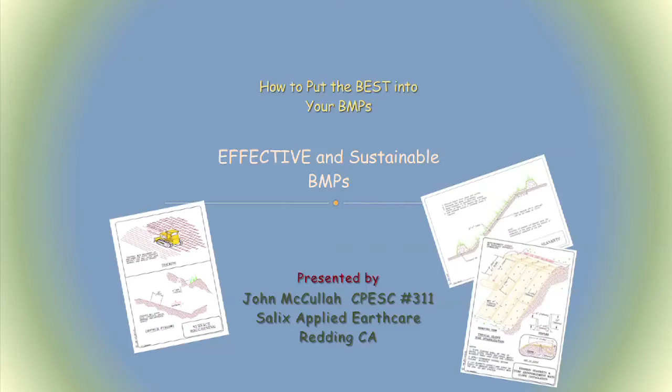Anyway, we're going to talk about BMPs, one of my favorite things, and how to put the best back in your BMPs, how to make them effective. It might sound funny to be doing a keynote on that, but that's what I like. It's what seems to interest us. It really is what drives the Clean Water Act. They are the methods of compliance. They're how we do it. That's where the rubber meets the road. We've got all these other things involved, and we have to understand the BMPs.

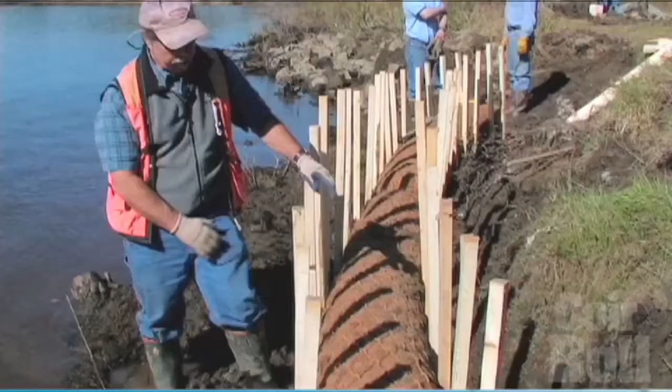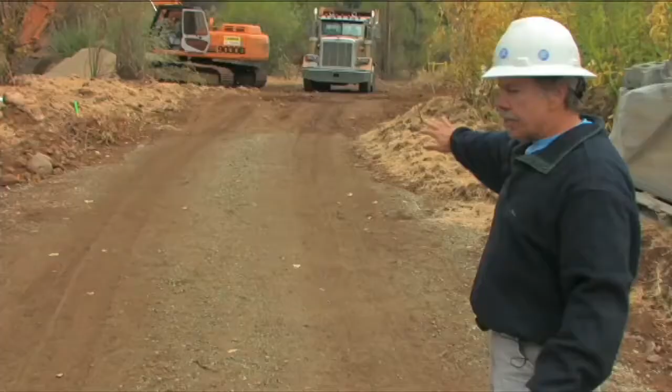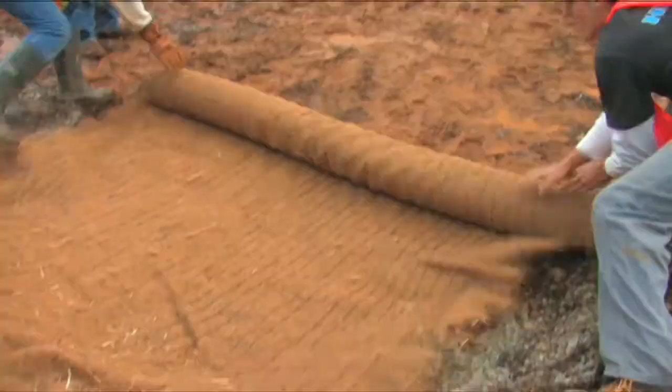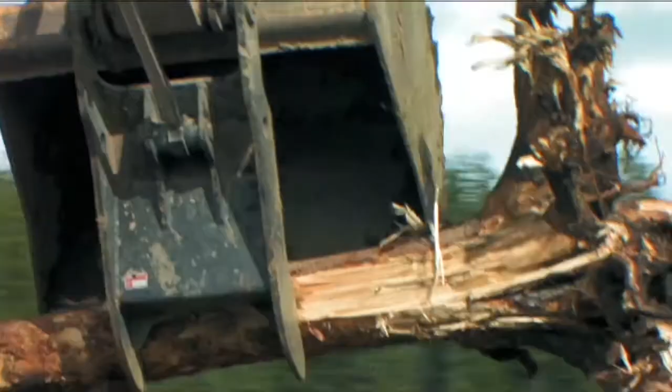Hey everybody, welcome to Dirt Time. Today's episode is going to be really cool. This is our extreme slope erosion control stabilization episode, ditch check episode, shoreline protection. We're in the Canadian Rockies, Fairbanks Alaska, the Hinton 2 project. So we're doing bioengineering, gravel bag check dam, live siltation, landslide repair, joint planting, the EnviroBurn, engineered log jams, root wads in there, energy dissipators, the rolling dip, a stormwater detention basin, the duckbill, this is a coir log, triangular silt dike, a live pole drain, articulated concrete blocks, the fascine bundle, rock-filled Gabion baskets, modified mechanically bonded fiber matrix, modified gravel bag check, EnviroBurn, native seed. So we're doing live staking here, mechanically bonded fiber matrix, I want to get some fine spray. We know mulch is good. This is the native seed, about 150 pounds per acre, 6 inches of base. We want it to sheet off this way, all the way up the slope here. Seed all the way up through there. There's one, there's one, working good. This is your driver, you got to get them all the way in. This check dam, it's holding back 1,200 gallons of water. Look at the erosion - the worst thing you could do is use stupid BMPs. It's like a little Gabion basket, quarter-inch hole. These branches will be planted, some rocks along in here. This will be our construction unit, next bag on top of it. Now with a few extra root wads in there, deflecting the water down. A live pole drain, or a draining fascine we call it. Laid these boulder clusters out in the river there, modified brush layers. Compost blanket down, the seed is in the mix already. Articulated concrete blocks, you can see how the blocks lock together. I feel good about this. I can't wait.

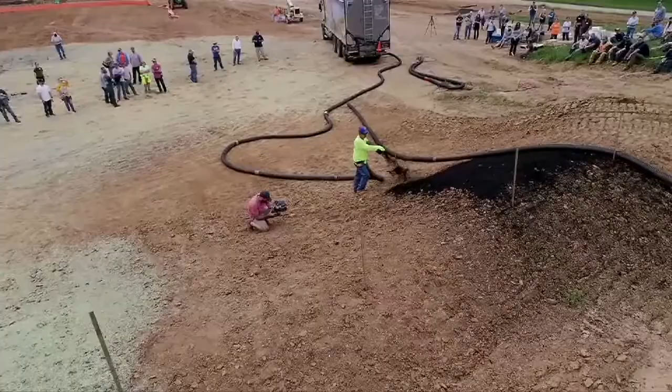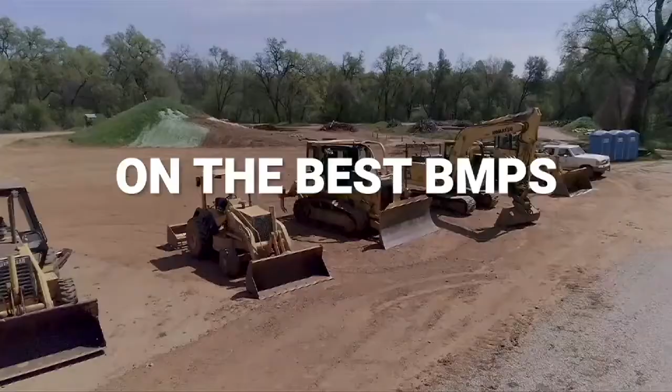Next to hands-on, the next best thing might be watching a video. If you have less runoff, guess what - you have less discharge. 90% of the erosion energy in the world is raindrop erosion. So what's the treatment for that? I just named 4 practices for erosion control that are greater than 90% effective, if you do it right. How do you choose your BMP? Let's put our BMPs in a toolbox so you grab the right one. We've got soil prep BMPs, we have erosion control BMPs. Now we're talking sustainable erosion control, right?

So we're going to talk about the BMPs today, the types of BMPs as they relate to erosion, so the types and causes of erosion. Remember, raindrop erosion is different than runoff erosion, okay? That's going to get us a long way. So we understand the physical processes, and then we can select the appropriate BMP to go with that process.

How many of you would really love to be able to inspect or review an erosion control plan and feel very knowledgeable and confident in what you're looking at? How many would like to be able to do that? And how many would like to be, when you're out in the field and installing something, know that you probably did it right, or at least you've got all the principles right? How many would like to do that?

Or when you're talking to Buck, the construction foreman who's out there, and you're inspecting the site, and he's been there 40 years, and he goes, get on out of here. I've been doing erosion control since you were a little tiny tot. I know more about this. And actually, they haven't had any classes in this and stuff. So again, I want you to be confident that you have the understanding on how to do this.

So confident review plans, and we're going to look at implementation of the BMPs. And they are the tools of compliance, as I mentioned. One of the things that greatly helped me was to put the BMPs in a toolbox based on the type of practice that we need.

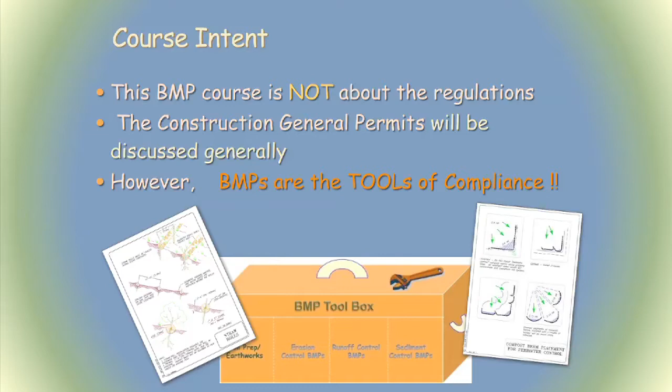So this training is going to be about putting our BMPs in that toolbox and getting it right. There's all sorts of courses out there about protocol, about SWPPPs. In California, you have to have a 22-hour training to be a qualified SWPPP developer, a QSD.

What does it require here to do a stormwater plan? Any civil engineer can do it? Who else can do it? Anybody? Anybody want to do it? Anybody wants to do it can do it? Who usually does it? Engineering firms?

Well, there's a lot of trainings, and I bet you that a lot of the engineering firms have been to these trainings, 22-hour trainings that tell you how to develop a stormwater plan, how to do inspections, what's a qualified storm event, all of those kinds of things. And that's not much talking about the BMPs.

One of the most important BMPs are those that get vegetation to come back. And generally, civil engineers don't necessarily have a lot of training in vegetative establishment. So there's a whole realm of this that maybe they're not exactly qualified for. Civil engineering was definitely qualified for all the hydraulic stuff. I wouldn't want to go out and design pipes and culverts and stuff without consulting a civil engineer to do some of the hydraulic calculations. Neither should a civil engineer call out some of the vegetative practices when they had no experience with those kinds of things.

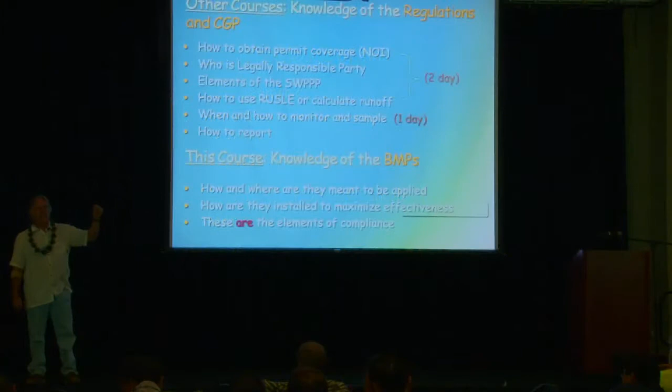And soil compaction, you know what we're doing now is we're decompacting the soils. If we want compliance, how many of you would love to have compliance, would love to have your notice of termination approved immediately so you could get out from under the stormwater plan? How many would like that?

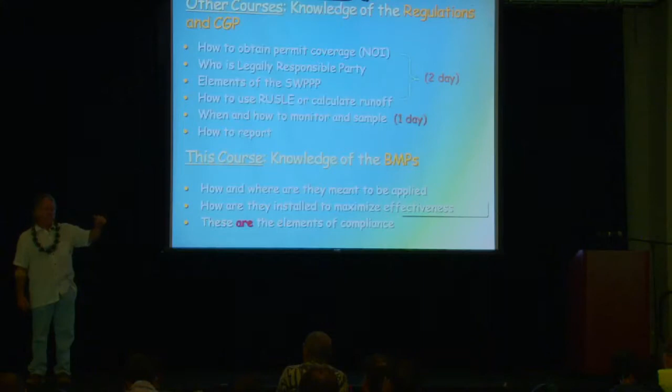So what's your goal? When you start the project, you should start it with the end in sight. And what's the end is to get that notice of termination, notice of completion, right? And what's that going to come from? Finishing the project, moving all your erosion control materials off the site, and having 70% cover of what was there originally. Adequate cover. Shouldn't we maybe start our plan with cover as our goal?

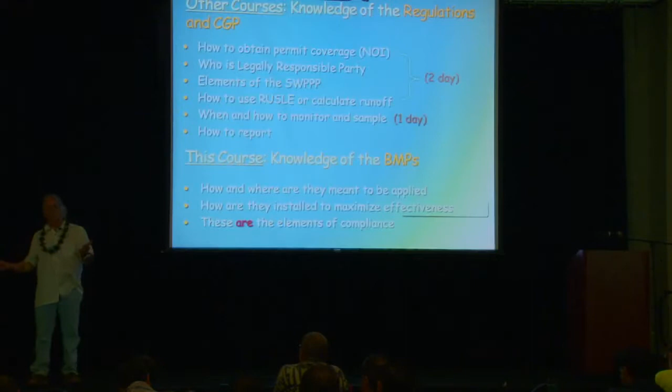Maybe things like compost, adding some compost to the soil, to really bad soil, thinking, at least when you go on there, how am I going to vegetate this? It's no longer, and I do this training with DOTs all across the nation, Alberta, New Zealand, and it's no longer okay for the civil to do the engineering parts of the highway projects and then just kind of leave the rest of it as an afterthought. It's okay to do that, but it ends up costing a lot of money, and you come back.

And then how about the requirement for plant establishment? 3-year plant establishment. Are we going to wait for 3 years to do plant establishment, and the whole time that project is under a SWPPP, where you're getting, how often do you have to do your inspections here?

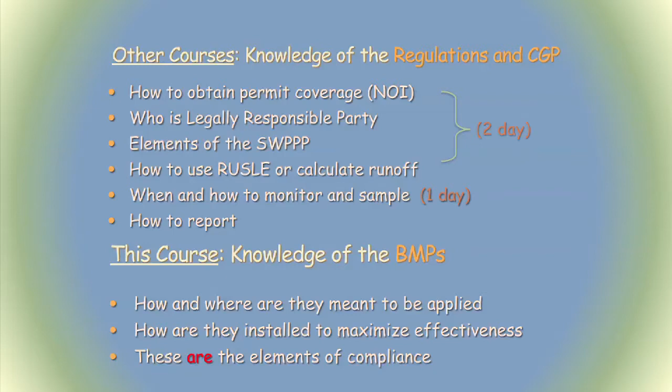Do you do inspections before, during, and after every storm event? According to the Clean Water Act, we have to do inspections periodically before, during, and after a rain event in California, and also at least once a week even in the dry season. That's a lot of paperwork, and you have to do all those things while you're under a SWPPP. So I want to get the SWPPPs done, get the notice of completion, and start looking at vegetation.

So we're not going to do this qualified SWPPP developer training. One of the things that's really informative is to talk to Junior Raindrop and Papa Cloud and see what's going on with them. Can you play this one for me?

Have you ever wondered about a raindrop's family? Let's drop in on Papa Cloud and Junior Raindrop. Uh-oh, Junior, get up, get up. It's time for you to visit your Mother Earth. Oh, Pop, let me stay here with you. Stop your pouting, and mind you, behave yourself. Get along now, off with you. Go along, son.

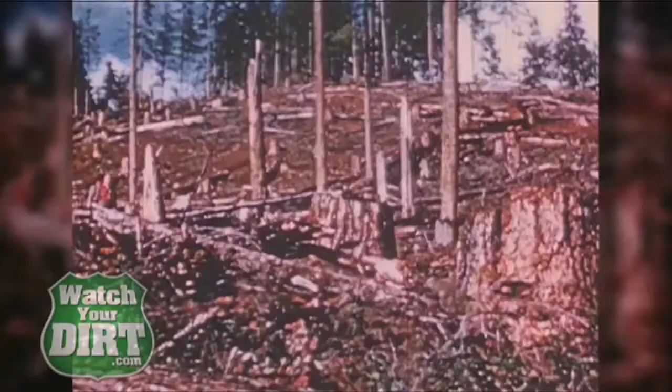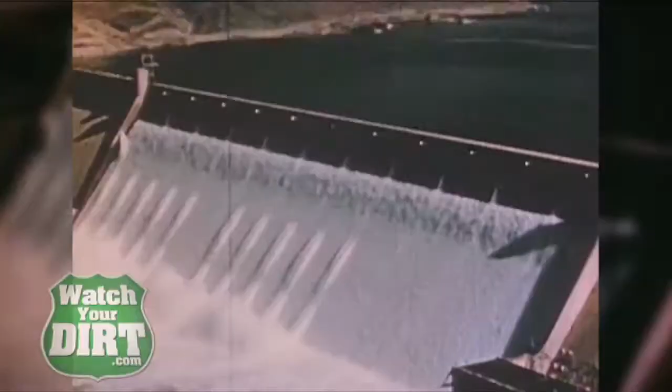Oh well, let's leave Junior to himself for a while. You know, little runaway raindrops love forests where too many trees have been cut down and rangelands that are overgrazed. They especially love burned over spots like this to dig their heels into. These hoodlum raindrops leave a trail of erosion, wasting soil that is needed to grow plants for grazing cattle and sheep, and trees for timber, soil that is needed for growing food, soil needed to store some of that water. They choke streams, soiling water needed for our farms, our industries and homes. They leave silt in reservoirs, wasted work. Reservoirs are built to store water, not mud.

Well, I wonder what's happened to Junior. Just what I feared, he's formed a gang, and they're whooping it up for a flash flood. They're rushing down the canyon. They've made a wall of water 20 feet high. Look out! Too late, now Junior is a real outlaw.

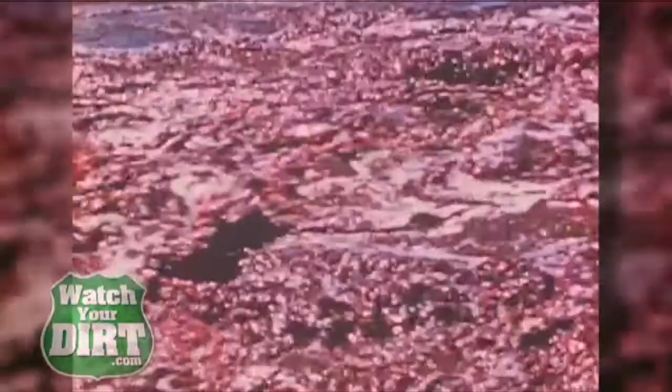No longer satisfied with flash floods, the gang is planning bigger and wetter floods. Junior's getting dangerous, he's getting tougher and bolder every day. Now he's a tough gangster, heading for the big time, raging along, waging gang war, robbing, destroying, killing. And all because somebody started a forest fire. All because no one cared about Junior Raindrop.

Now, if Junior had fallen on something soft, I call it cush for his tush, he wouldn't have gotten a bad attitude. You know how vulnerable children are that first couple of years after they're born? If he falls on a soft cushion of vegetation, or if it's not vegetation, it could be straw, or it could be a bonded fiber matrix, or it could be hydromulch. Do you think Junior knows the difference between landing on grass and landing on a soft erosion control product? He doesn't know the difference.

And if there's some grass already growing, Junior can just hang on, fall down the limb and go down and let himself down, and actually kind of sink into the soil. He can go back into the soil, run through it as subsurface flow, and come out at the streams or out at the ocean where he's nice and clean, and he can play with fishermen, and he can make a home for little fish and stuff.

But the alternative is Junior starts running with a gang, hanging with a gang, selling crack cocaine on the street corner, carrying weapons and stuff. The only thing we can do is surround them and catch them in a sediment pond, and we don't have much luck. It's like putting them in prison. And then I like to think of it, we take all the kids and shake them upside down so the switchblade knives fall out of their pockets and stuff.

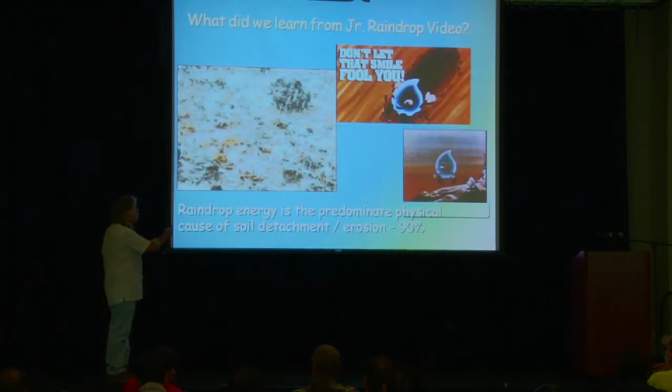So the raindrop impact is the number one precursor of erosion. 90% of the erosion in the world happens with the raindrop falling out of the sky. My physics professor at Humboldt State University showed that a raindrop will fall the average distance of 30 feet and reach its maximum velocity. It could fall out of a tree and reach maximum velocity. That is the energy that dislocates the soil particle.

It doesn't matter where we are, in what part of the world we're at. In the desert, when the rains come, the raindrop is going to dislodge the soil particle, or you're not going to have erosion.

And then we have this: are we going to let Junior gang up and run as a gang? Because when they start running as gangsters, that's not raindrop erosion at all. What is that? That's the tractive force of flowing water. That's an entirely different physical process.

Does straw mulch work for concentrated flows? Does it work on gangster action, I call it? What can work on gangster action? What kind of BMP? Name one.

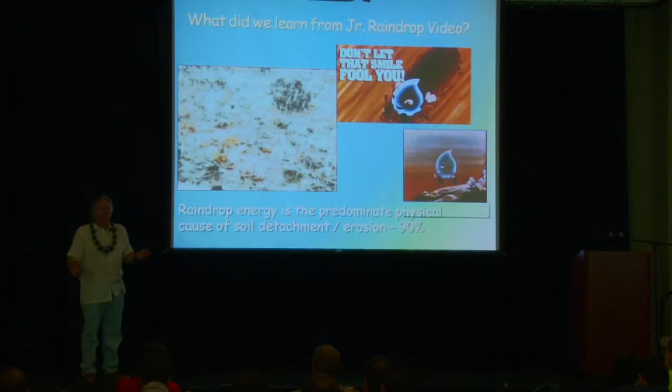We could put them in a culvert. The culvert won't erode. Cement. We could figure out whether cement or concrete or steel fabricated pipe would be better.

What's the better thing? We could put them in ditches and then armor the ditches so that the little guys that are on chocolate and stuff, and they've got skateboards, right? And they're ripping it up. They're doing half pipes and stuff, and they want to tear up that channel. And so we could line the channel with something they can't destroy.

And that would be like a turf reinforcement mat, strong enough to inhibit, but we're not going to be able to do things with mulch and hydromulch. Okay, and then the last thing we're going to do is try to corral them into a sediment pond.

So here's our little Junior Raindrop, this little guy right here. And as parents, what are we going to do? Get an insurance policy and hope that he lives to 11 years old, you know?

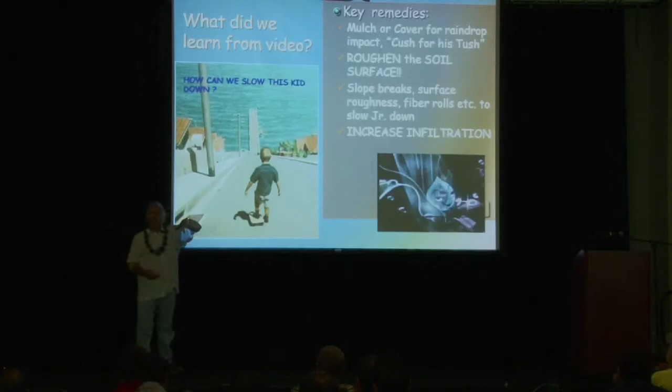Maybe what would be the best thing to do if I was a parent is I would be throwing gravel in front of him so he could never get going fast, right? At least he'd be on a skateboard, but he couldn't get going really fast. So that would be one way to do it.

We could certainly cover the ground and have cush for his tush, and then we could also roughen the soil. Oh, you mean I can't make the soil slick and hard? Backblade it with the loader?

What about the motor grader? Shall I blade it really smooth and hard? Shall I run the excavator, clean the slope up and down? Shall I use the teeth and scarify the slope up and down the slope?

No. I was just making a bunch of half pipes. Junior and his gang will be so happy with you if you did that. They'll be doing these snowboard deals and skateboarding and surfing.

And so we want to do our striations across the slope. We want to roughen Junior up, roughen the ground up. So hopefully you're never going to do things different.

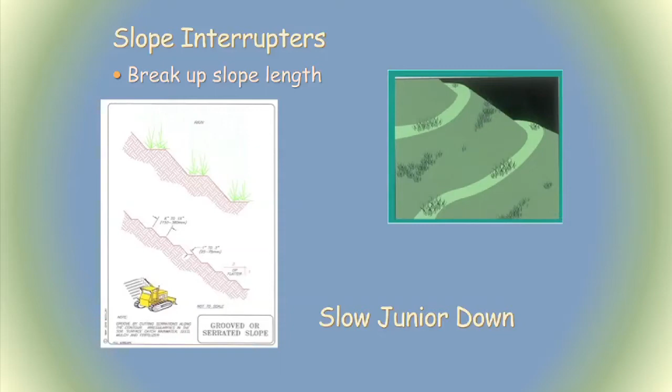We can slow Junior down, break up the slope length. One of the ways of doing that is with slope interrupters. And you're all probably familiar - this is California. We use slope interrupters like candy or something. You know, we put them everywhere to break slope up. And then there's battles within the various counties about what kind you're going to use.

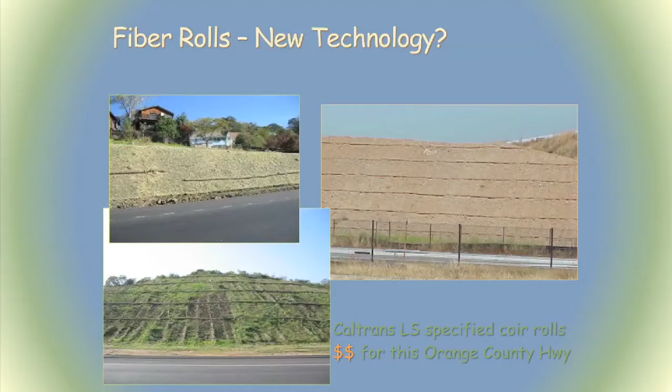Like in Orange County, they're really rich down there, and they buy their logs from coconut logs from Sri Lanka. They're not going to allow straw in Orange County. But anyway, you break up the slope length, and in the manual, of course, if the slope's steeper, you'll put your slope interrupter sooner, because Junior can get going too fast. If he's gentler, you can have them farther apart. Does that make sense? Okay, we're going to demonstrate slope interrupters.

Here's an example. I worked for several years for the state vehicle recreation area. This is a place where they ride motorcycles, and they're pretty thrashed watersheds, actually, already. And back in the early 20s and stuff, they were having these motorcycle climbs, these races. They were using alcohol-fueled motorcycles and alcohol-fueled guys with short necks.

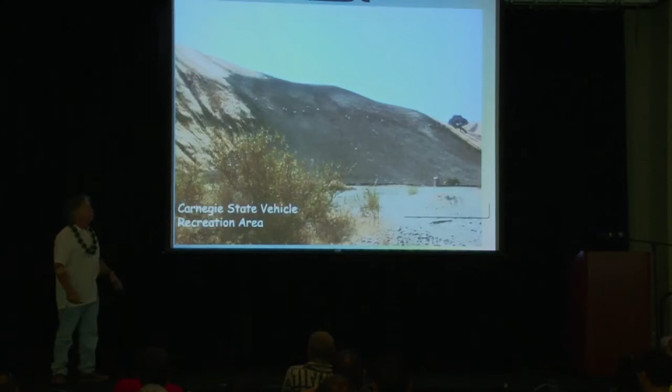And crazy what they were doing, and they're still doing it today. They'll climb these hills, but now it's a family deal. You go out and have places where you camp, and the husbands get to race these motorcycles. Because Kawasaki and Yamaha sponsor it, and there's so much money, 20,000 people come to one of these events, there's money to go back and fix the slopes afterwards.

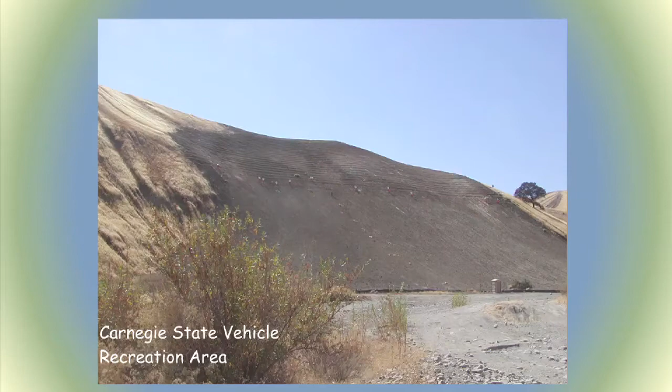And they're fixing it right now. Those are inmate crews, California inmates. I'd like to see more of this kind of work. We've been letting them out too often, and before they let them out of prison, we should be putting them on these crews and let them work a little bit on that.

And there's putting fiber rolls. They track walk that slope. Can you imagine it? Somebody ran a bulldozer up and down that slope. And this was just 7 months later.

That's just an extreme. So they scaled the slopes, they track walked it. By the way, that's 52% effective. They put straw wattles, they put mycorrhizae fungus, because that's an important relationship with the native grasses. They used organic fertilizer, so they didn't kill the microbes.

We're going to be at a compost facility tomorrow. We don't want to kill the microbes, we want the microbes in the soil. They actually sequester carbon also in the soil. It's our last big opportunity to sequester carbon. And then we use California native grasses.

So Caltrans has got this $300 million fine, and they're developing protocol and trainings and stuff, and in lieu of paying it, they've got a test facility, a test bed, which they tilt up 2 to 1, and they put various practices on it. And we studied track walking. They took the grousers off a D6 dozer, put it up on that test bed, and engineering students at San Diego State University rained on it.

A 10-year return interval storm for LA, that was 1.75 inches in an hour. That's a pretty good storm. Your windshield wipers are doing double time. You could be careening off the highway if you're not careful.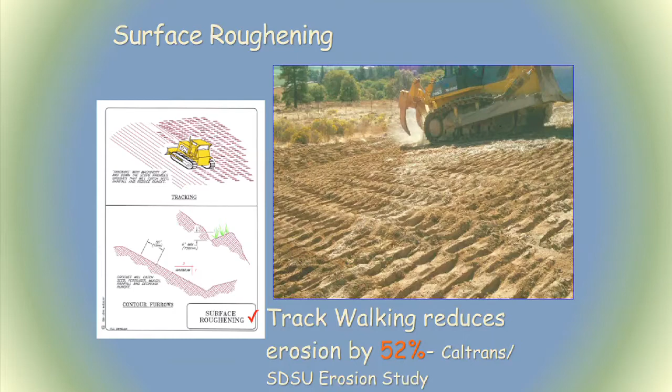And they tested it, set it down, dried it, replicated it 16 times. And they found that track walking is 52% effective. How many BMPs out there are 52% effective that you know of? What's a gravel bag in a curb? 3%. Studies have been done. We're talking 52%, if you turn that dozer around and walk it up and down the slope.

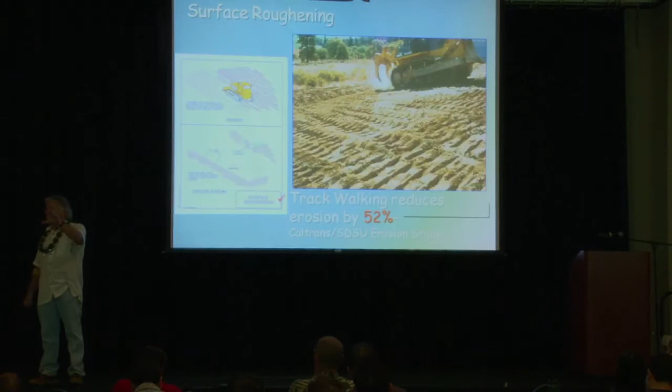Now the next thing Caltrans decided to do, they couldn't get the contractors to do it. Remember, our goal is to get vegetation down because we want our notice of termination. And they said all slopes prior to putting on erosion control materials should be soil prepped. And they go, yeah, they left it just like that. Well, the contractor got to do whatever they wanted.

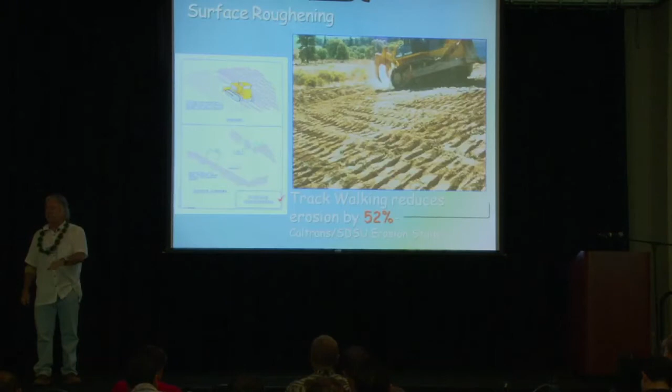The one that's 52% effective is track walking. It takes a lot of time, takes a lot of diesel to do that. At 52%, it behooved Caltrans, because they were getting fined, it behooved them to make this a pay item. The only way you're going to make this fair, you can fight with the contractor or make it a pay item and put it down.

So I'm urging you, some of these BMPs, put them down as pay items, or you're going to get it in the long run, you know? And so it's 52% effective. That's how it works. Can you play this one?

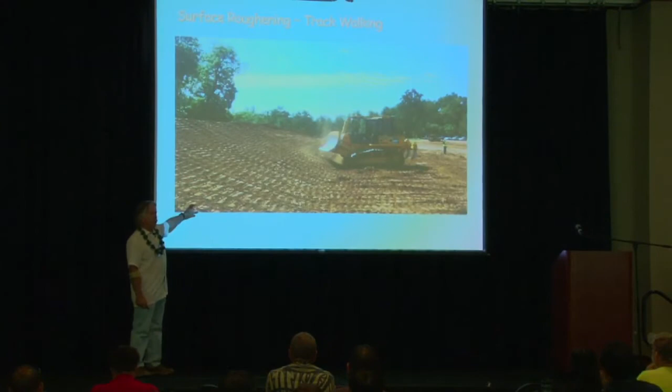If we had an acre of slope like this, with real erosion, we could expect 30 to 50 tons per acre to come off of that slope. 1 acre of slope like this, to track walk it, it's 52% effective. We reduced the sediment coming off of that. It was 1 acre at 50 tons, and we're getting half of that, so now there's only 25 tons per acre per year coming off that site.

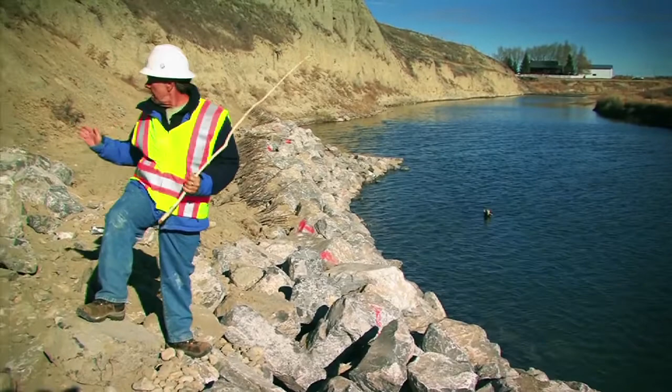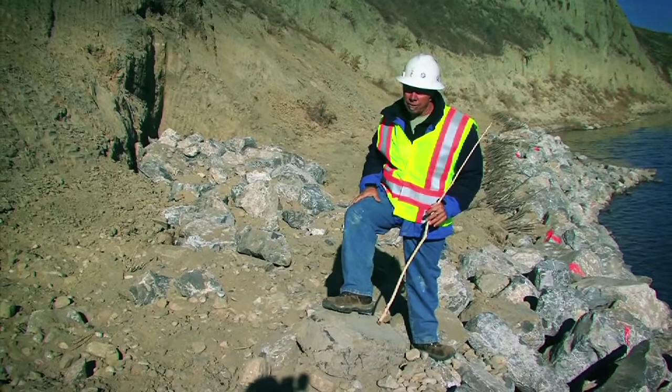We want to make sure that the water never gets around behind our structure. If it does, we want to make sure we have a very strong tieback or keyway at the upstream end. This trench here, filled with large stone, provides that protection. If water was ever able to get around behind it, this structure will force the water back into the river.

Right here we have a really good example of track walking. Track walking is a method using the bulldozer to roughen up the surface of the slope. It's in the realm of surface roughening - we have to prepare the soil before we seed it or mulch it. This technique uses a bulldozer to walk up and down the slope so the grouser tracks are perpendicular to flow. It's a really effective structural technique before you even bring your hydromulch out.

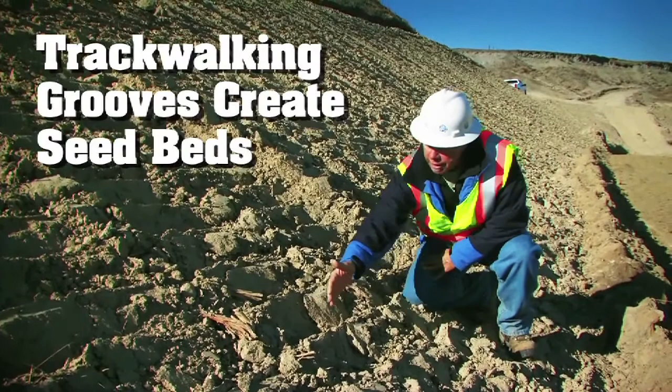It reduces erosion. In fact, a Caltrans study shows that this technique alone reduces erosion by 52%. It provides roughness on the slope face so the water can't build up speed - it slows down and can infiltrate into the soil. Every one of these grooves from the grouser is an area where seed and moisture will collect. Chances are we're going to get most of our vegetation growing in these grooves.

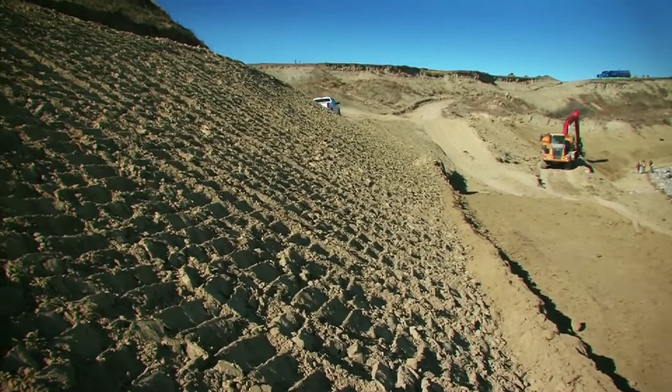One of the things about track walking is it increases surface roughening. By track walking the slope, we've increased our surface area by 25 or 30%. So if we're applying a hydraulic mulch, now we have much more area to cover, and we might need to increase our application rate by 25 to 30% because of that increased surface area.

Good job - you can see it works in clay, silt, and sand. Probably the only limitation of track walking is how steep you can get your dozer up. This is 2 to 1, slightly steeper than 2 to 1, and they had no problem at all track walking this.

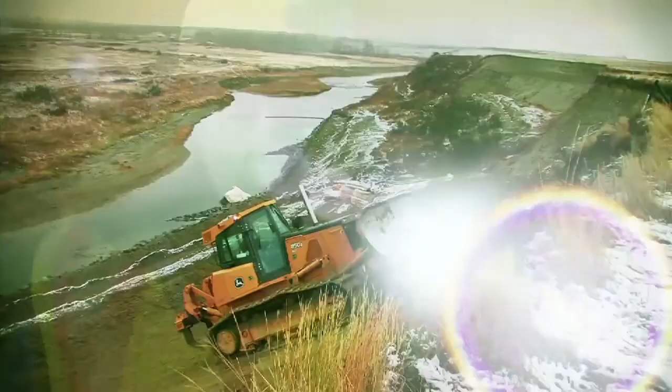This is probably one of the simplest techniques. We've always got a bulldozer on site - just turn it around, have the operator walk it up and down the slope, and you reduce erosion by 52%. It's almost a must on every construction site that you possibly can track walk it.

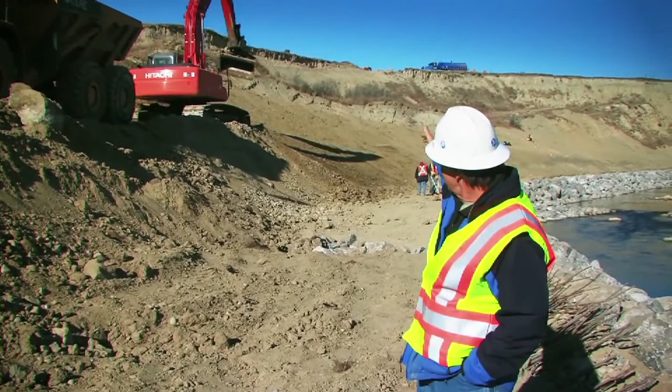The technique he's doing here is another form of surface roughening, called serrated slopes. He's using the teeth on the bucket of the excavator to try to get some serrations going.

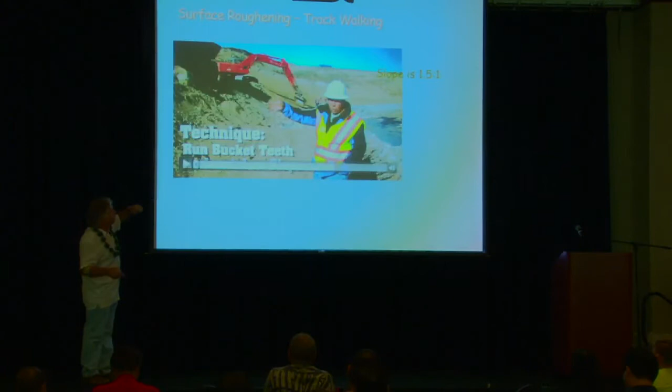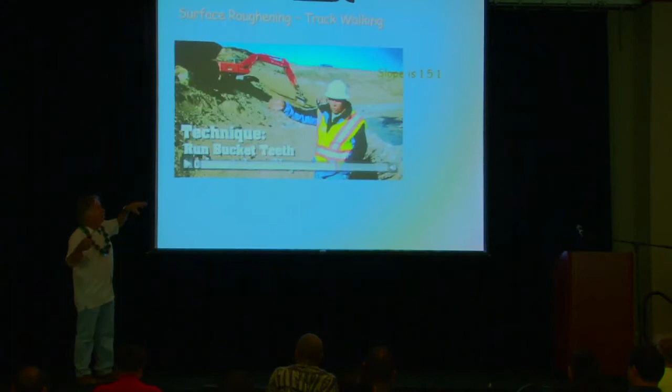On this large project, we put in a longitudinal peaked stone toe with live siltation. This whole design was a training workshop, and it was also a $2 million project. This is the main north-south highway for Alberta, and Alberta DOT was so stoked about learning some of these techniques. We had a workshop going on at the same time, trying to save this highway. So we either track walk it - we had 35 engineers in the province out there - or you could use this articulated excavator. Go ahead and play this.

It's going relatively horizontally - he's trying to keep the serrations as horizontal as he possibly can. Like track walking, it's going to slow up the rainfall from rolling down the slope. It provides little pockets for seed to collect, and the serrations in the slope will slow the runoff down. That's another nice technique - on cut slopes, you'll at least try to serrate them.

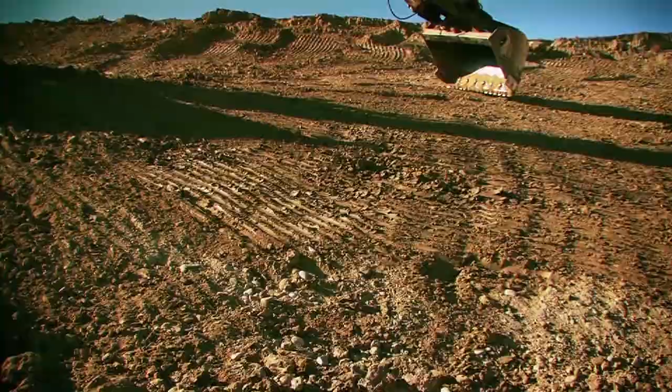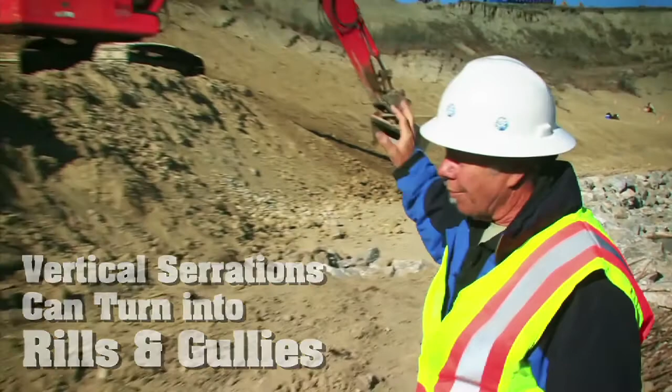The alternative is we've always cleaned off the slopes, but a lot of times the easier way for the operator is to scratch the slopes down, and then our serrations end up running up and down the slope, which are actually incipient rills ready to form. So you've got to groom these slopes anyway - let's groom them horizontal. Always try to keep it horizontal so that raindrop rolling down the slope has to slow down. And leave the slope as rough as possible so you have a seed bed where those seeds can actually become established. That's critical.

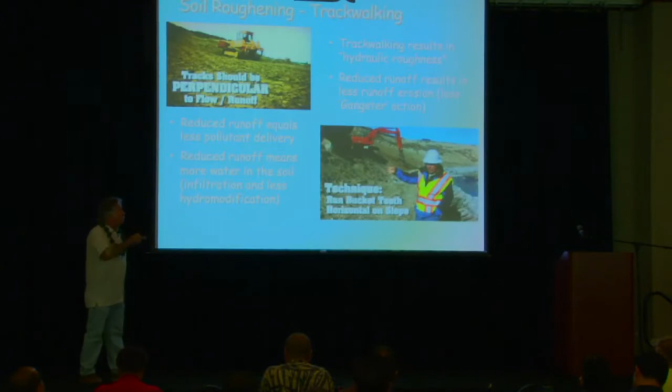It reduces runoff and increases infiltration rate. The question earlier was what kind of slopes can you track walk on, and the video shows we can do it on almost all slopes. Sandy slopes will fail a little bit but won't get overly compacted. Clay slopes you don't want to track walk too much, or you'll over-compact.

Why would over-compacting be a problem?

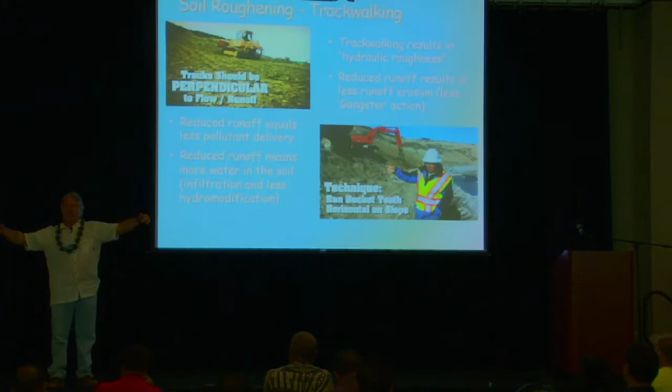We want water to go in and infiltrate a little bit. Unless you're in the highway prism or the engineered section, we would love the water to go in - in fact, vegetation likes 85 to 90% compaction. So we got Caltrans geotech engineers involved. If we had the right-of-way on highways, we have an opportunity there. Safety requires a 12-foot wide recovery section, and beyond that could be decompacted. In fact, the angle of repose is 2 to 1, and they agreed soils would stand at 2 to 1 naturally - we don't need 95% compaction.

Does that make sense? You've got your highway prism here, and you've got the other part of the highway - that's an opportunity to infiltrate and grow vegetation. Don't compact it to 95%, keep it at 85 or 90. Does that make sense? It was quite a political process to get geotech engineering involved in it too.

Okay, so we got our toolbox now. I'm a contractor also, and I was a handyman for a while, and I wanted to keep my tools lined up. I didn't want to grab for a pipe wrench when this lady wanted me to paint her house. You grabbed the wrong tool. We're always grabbing the wrong tool.

Grab the silt fence, grab the fiber roll. What's the problem? You got acres of bare soil. What's the problem? I want to grab out of my erosion control BMPs. I want to grab there. That would be mulching, erosion control blankets, compost blanket, and straw mulch. That would be for cush for his tush, right?

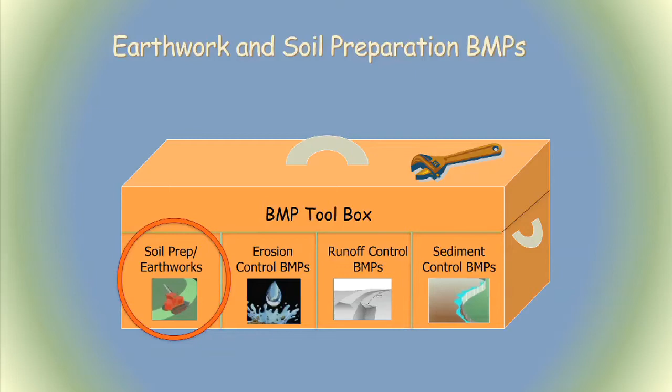I don't want to grab the wrong tool because it's raindrop impact, or I'm going to put my runoff control BMPs in there and sediment control BMPs over in the other section. These are sections I'm going to talk about later today also.

So roughness, track walking, it makes nice little places for the seed to catch and moisture to catch for plant establishment. There's step slope, slope rounding.

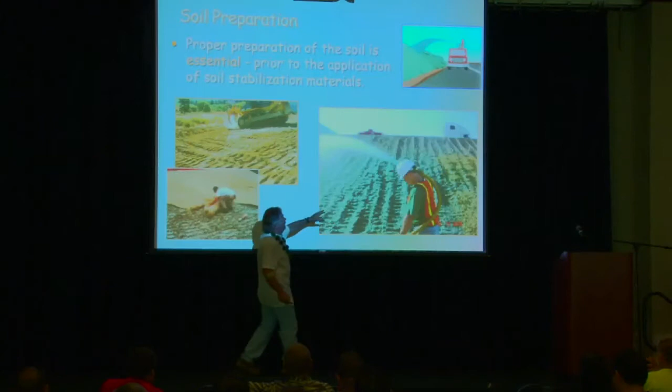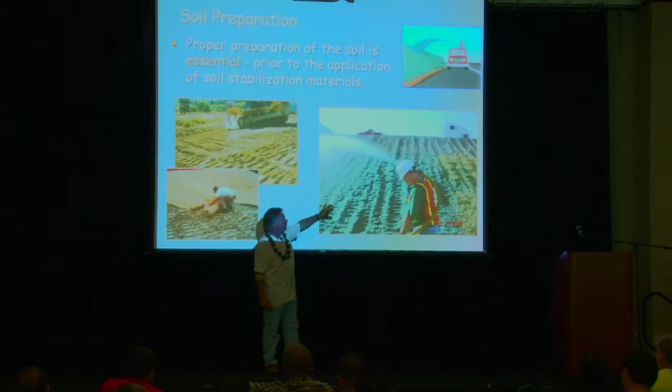I just want to mention while this picture's up, this is a BFM. This was a training we did down in northeast Los Angeles County. They had track walked this slope, and they did not intend to complete the slope. Why put grass down on it? They would have to remove it. A little bit of fiber does not damage too much wood in your fill. It doesn't compromise your fill.

So anyway, we placed this BFM on here at 4,000 pounds per acre, and we came back a year later and there had not been a bit of erosion. All the mulch was still in place. So sometimes you can buy a mulch that will last a year. They have another mulch like Flexterra that has coconut fibers in it. It'll last 2 years with no grasses.

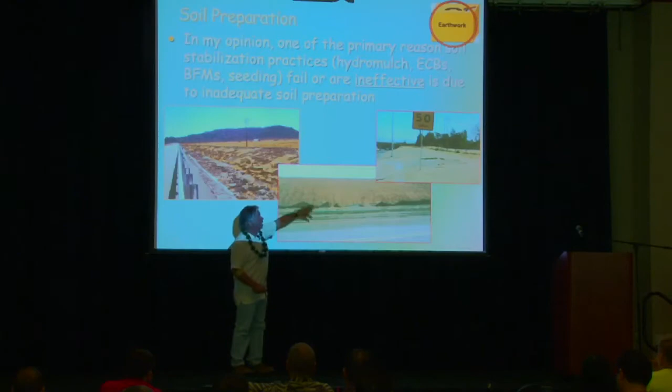I think that inadequate preparation is the problem. This is in New Mexico. They ran the tracks the other way - they ran the bulldozer this way, so the grouser tracks went this way, and the stuff just fell off. This one was cleared with an excavator. The guy was trying to clean the slope and formed rills already.

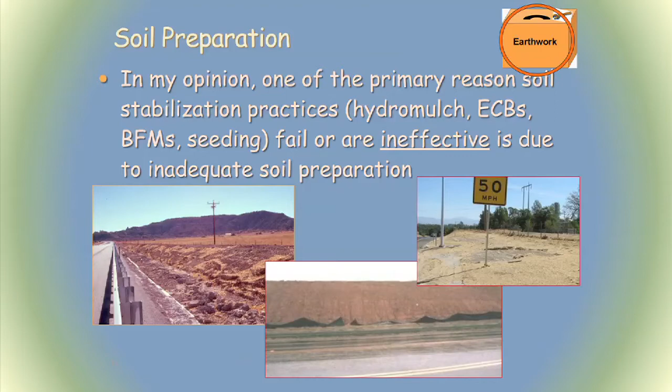And Caltrans in Redding had done this one. They wanted to regrade the side. They didn't even scarify or roughen the soil. This is a highway, a windy canyon through there. They put the mulch down and tacked it with a hairspray, and when the winds came, it rolled all the mulch up like a tent. So again, if you don't surface prep your erosion control, there's no guarantee it's going to work. Some kind of surface prep, some kind of surface roughening.

Look at this one. This is a big tall slope down in Lompoc, California, and on this long slope they used this really expensive coir netting, 900 grams per meter. And look at that - you can see now there's rilling going on under it. That's a long, long slope. That slope needed a slope interrupter. But it's really hard to put a fiber roll across that because you have to put the fiber rolls in a ditch, stick the stake through, and then are you going to wrap over the top of it? No, you don't have to.

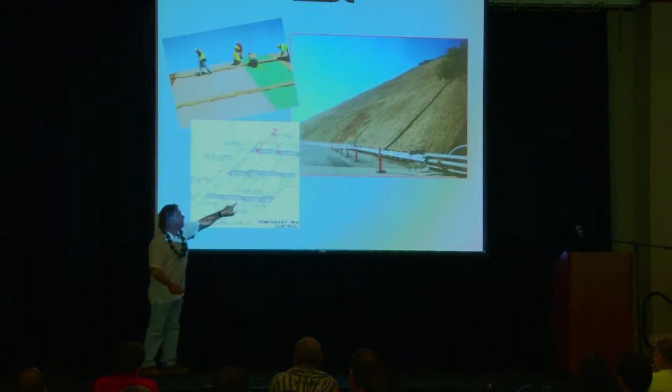We got a new technique. We could have roughened it, but the new technique that Caltrans approved is you don't put it in a trench - you put the fiber roll right down on top of the blanket or not, and then you use rope and twine every 2 feet on center. You put the rope down, and when you pound the stake in, it pulls that rope right down on the slope. And there it is there.

I want to show you this technique on Thursday, but there are 2 methods for putting in your fiber rolls, your straw wattles, whatever, your compost socks. You can go right through the heart - we call it the vampire - through the heart every 4 feet, or go 2 foot staggered with rope across with no trench. My guys like to not dig a trench, so they'd rather do the rope. It's one extra stake per foot.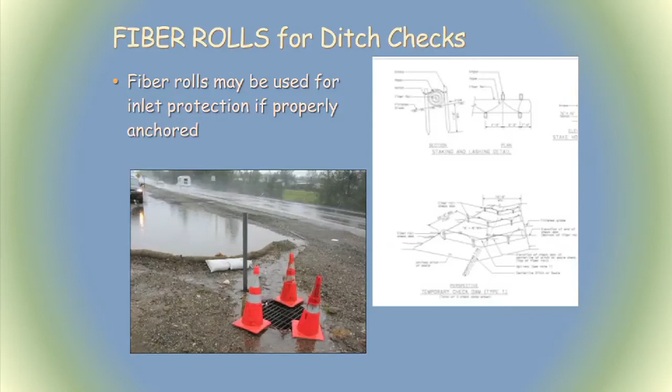There it is, the stake and twine method. Big believer in it, especially if your compost socks or bio socks are going to be put in a waterway where there's hydraulic pressure. The bigger the roll and the more water that gets ponded up, the more hydrostatic pressure there is, the more chance of a buoyant effect, like sitting in a bathtub—it'll raise that thing up and the water will go under it, and you've lost. So you really should use stake and twine when you're in ditches or channels.

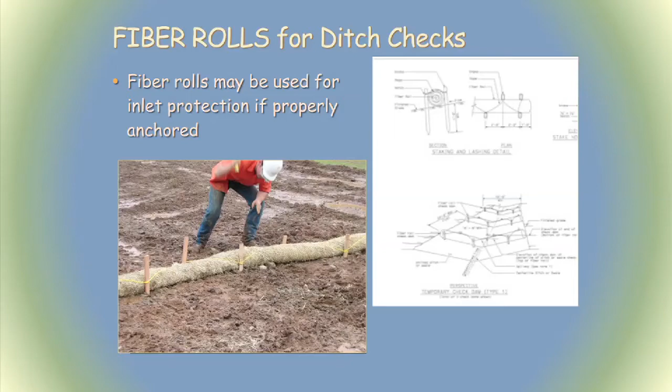And there it is in a channel. We use a lot of fiber rolls as a temporary measure to slow the water down in a channel at Caltrans. Notice when you do fiber rolls on a compound slope, make it so it has a little J-hook on the end. This is where your sediment collects, there's your pond—it catches. If you don't put that pond in, the water just keeps going along, same with the silt fence, until it forms a gully. We've got to use the J-hooks judiciously.

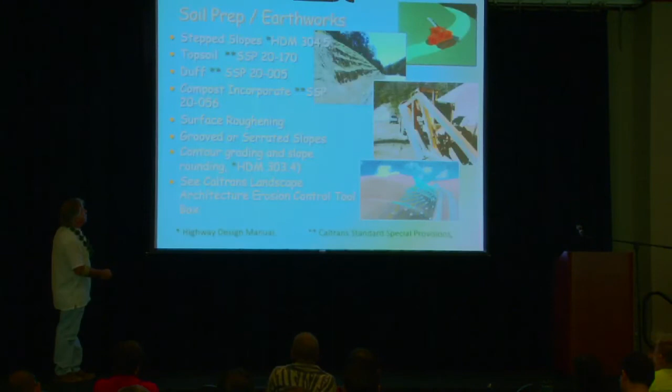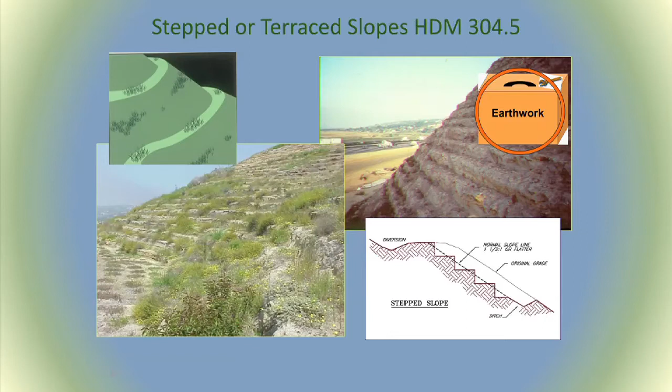I'm going to go kind of fast through some of these. There's stepped slopes, serrated slopes, where you cut the steps to save the topsoil—what little bit there is in the desert—like on your leeward side, and then you put a little bit of that seed and special duff back. That's what they're doing in San Diego.

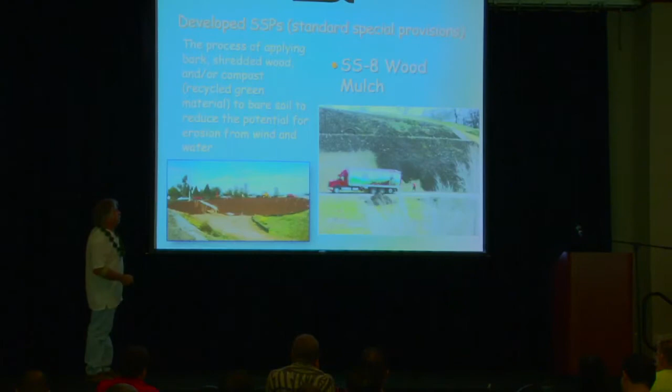And then this is wood chips, and that's compost. Look at that compost going down—that's one of my projects. I put 700 yards of compost down on this old burn dump that was restored. That's steeper than a 1-to-1 slope, and that stuff never moved. I was able to really reestablish native vegetation.

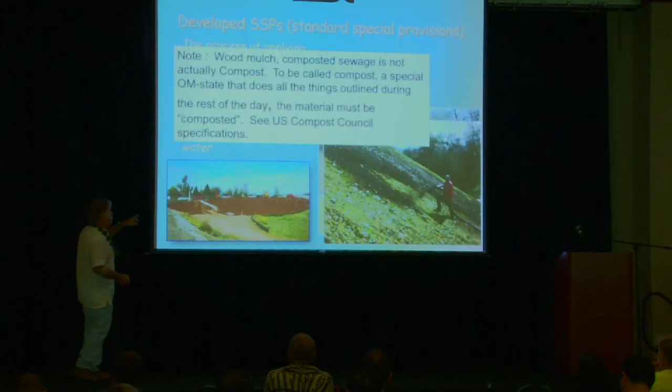Now, from now on, when I use the word compost, it means it's been composted—it's gone through 37 days of composting, cooking. It reaches 130-some degrees for so many days, it's turned and aerated, and then it's set to age and cure. This is not compost, this is wood chips. People keep telling me, John, how can you put those compost? I've seen wood chips float and fail. Compost doesn't act like wood chips—it doesn't float, it's really heavy.

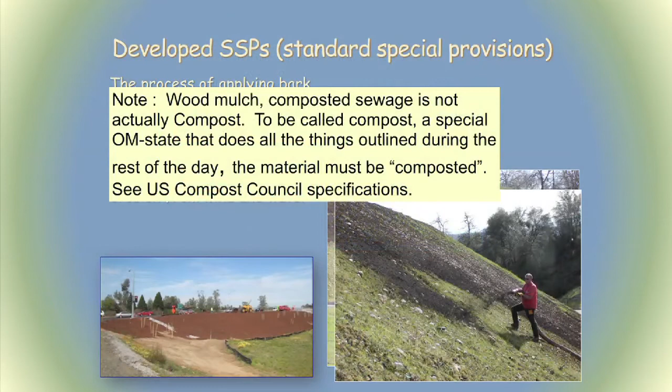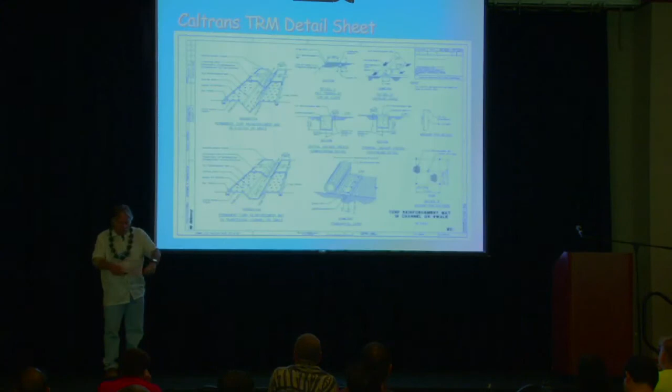ECTC, the Erosion Control Technology Council, the manufacturers of these blankets, said it's okay if you don't do a trench or check slot—you put 2 rows of staples, 4 inches apart, every 2 inches. So you've got a double row of staples, so that when water gets under the blanket it's got to come back up, because Junior and his gang will run under the blanket and erode. You need a check slot for those to work properly.

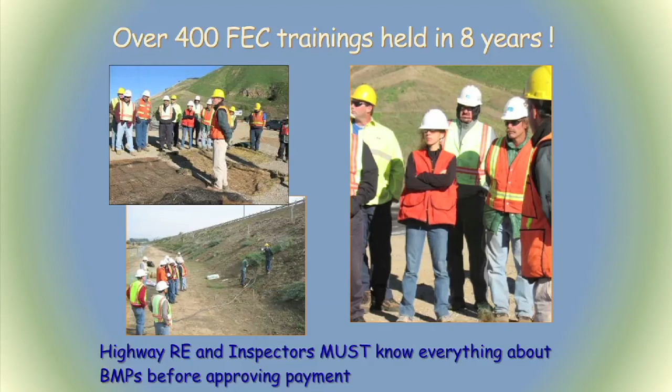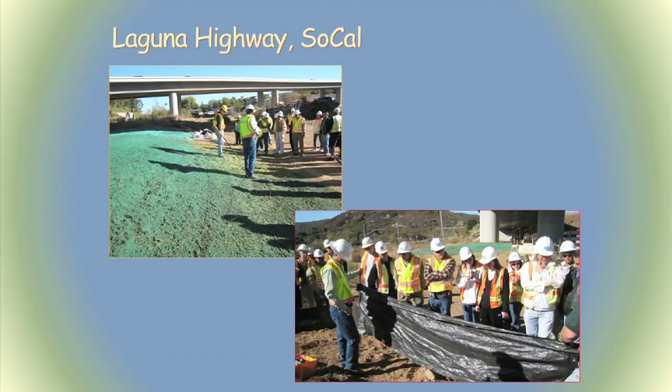Caltrans Stormwater Pollution Prevention Training—we did this training for all the DOTs. I did around 400 of these over an 8-year period. We have 11 districts in California, and we did hands-on demonstrations. It was really good for the DOT staff to go through this—they would feel the products, get to see it, and we'd hydroseed and hydromulch. The thing is, we'd be in Compton, California, Wilmington Avenue, drive-by shooting, San Bernardino. No place was safe—you can't go there anymore.

What have you got? Okay, is that an absolute? Okay.

So let me just get to the point here. We decided to build an erosion control training facility at Shasta College, to let everybody come to the college rather than having these unsafe places to do a lot of our training and demonstrations. And we built hills and all sorts of cool things. All right, how's that?